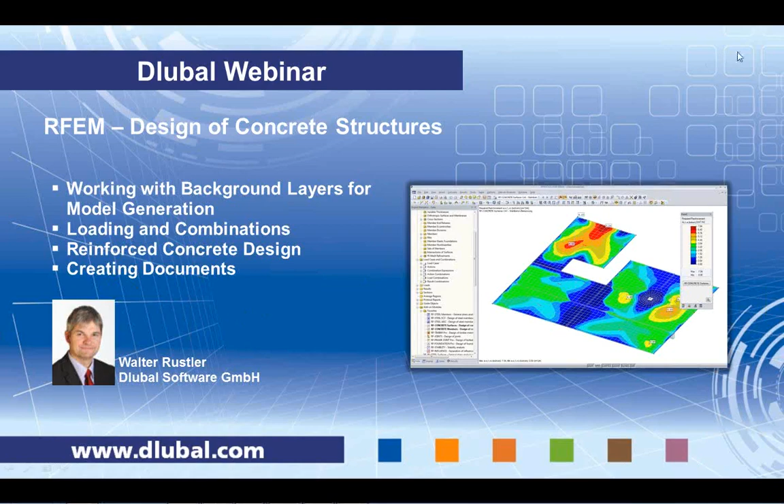The workflow in RFEM is in such a way that you use RFEM, the main module, to create the slab and the concrete structure itself, including loads and combinations. Then you will use certain modules to do the design in concrete. The most important modules are RF-CONCRETE, that includes slab and beam design. There are also additional modules for punching design, namely RF-PUNCH, or for column design, namely RF-CONCRETE Columns.

RF-CONCRETE NL is a more advanced module for nonlinear analysis, especially used for deflection of slabs and for deflection of beams in cracked situation. RF-CONCRETE Deflect is a more simple module that we can use also to analyze deflections of slabs.

In the concrete design modules, we have the following codes available: Eurocode 2, ACI 318, which is the American code, SIA 262, which is a code from Switzerland, GB 50010, which is a Chinese code. Other codes are in preparation and will be also published on our website when they are available and finished.

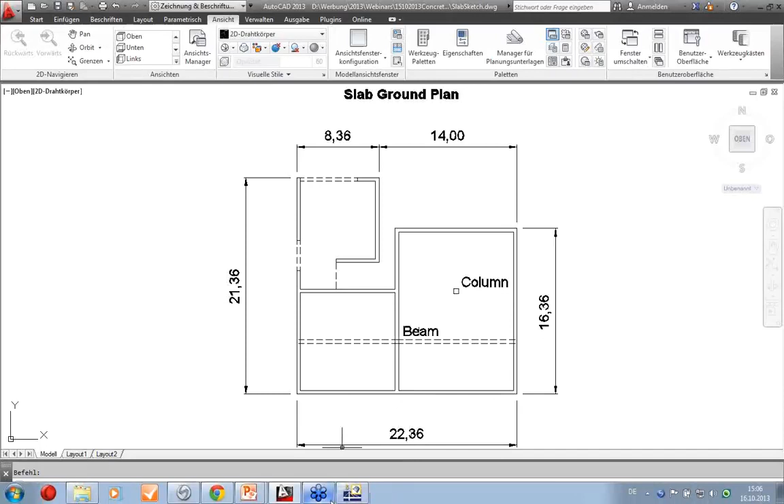To do this, I open a new structure inside RFEM, and I'll have to enter a model name. It will be a 2D model, and the loads will be according to Eurocode EN 1990, and we'll use the general settings for the national annexes throughout this project. We'll create combinations automatically according to this code, and we'll create result combinations, which are linear superpositioned results of the individual load cases.

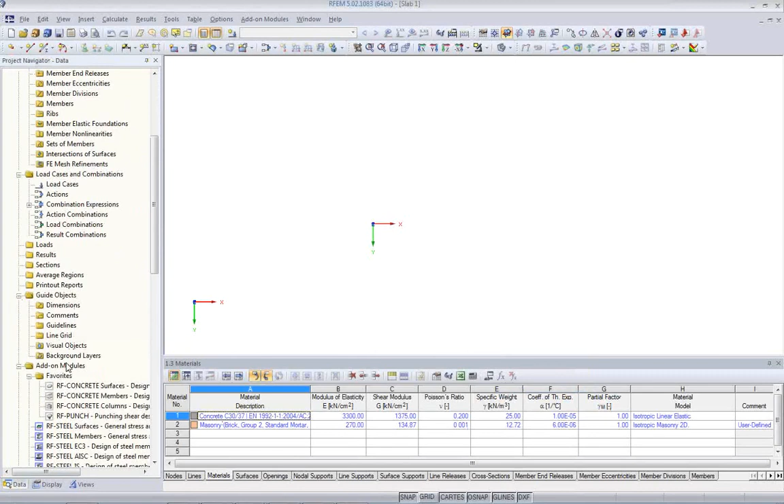Now I can import the background layer. Either you can use File, Import, and you see here DXF format, import as background layer, or you can also go to the Data Navigator and use the Guide objects, and here you find background layers. Right click on it and create a new background layer. I'll import one DXF file I have prepared here as a background layer, and you can name it as you like, sketch from CAD.

Also, you have the option to import from a specific layer that you can select here. You might have drawn already certain lines inside your CAD application that you might want to use for your boundary lines, for your surfaces, but in this case I import the entire lines that I find here. I click on OK, and you'll see the outlines of the slab already in the background. These are not real lines, I cannot touch them at the moment.

Now the situation is so that my actual structural system will not be all the way to the outside of the wall, but maybe already end in the center of the wall. And often as the structural boundary we use the center or the middle of the wall where the slab is placed on. So how to do this?

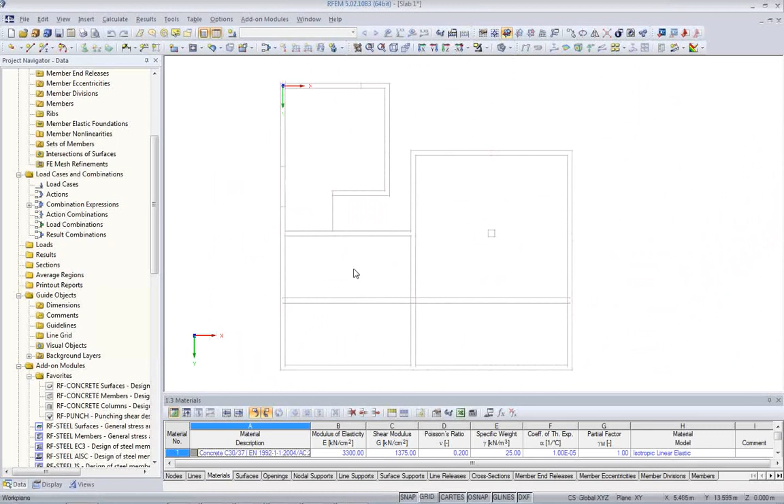I can now use a tool called Set Parallel Line. With this Set Parallel Line tool, I can create a line that is offset from a line that I pick in this background layer. The offset I use here is half of the wall thickness, which is in this case 18 centimeters. And now I can start clicking on the line, and you see in the center of this wall a line is created.

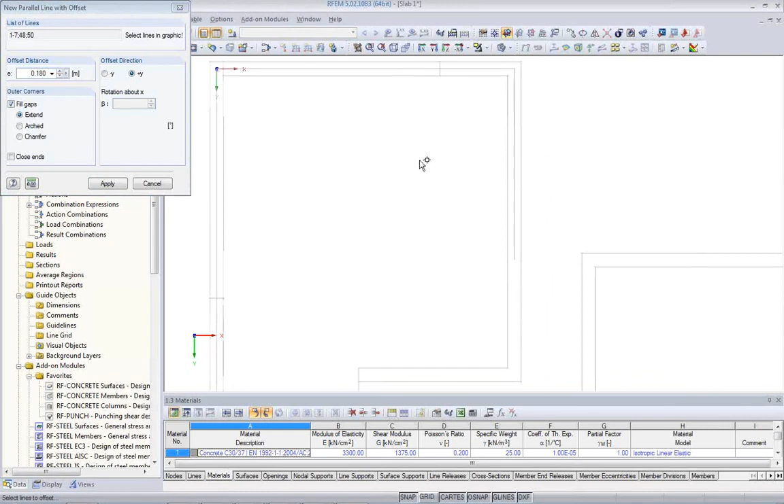And I can now just simply click on all the wall edges that I have in my template and go around the slab here to quickly grab the geometry of the structure from this background layer. So I do not have to use any printed plans or manual drawings, calculate coordinates and so on. So the software is helping me here.

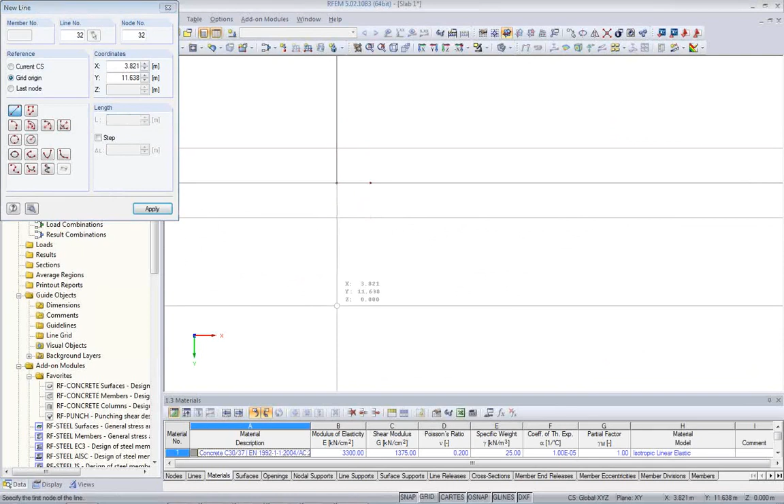Okay, one more here. And then I have a pretty good idea of my slab. So I have to make a few more adjustments. For example, here my drawing wasn't that good, so I can enter manually now a line. I can snap to the existing nodes and create a perpendicular connection here. I don't need this line anymore, and I can just drag and drop the neighboring node there. So with a little bit of manual work, I can fix up my model here.

Here also I'd like to have a perpendicular connection. I just drag and drop it to the next line and fix my holes here. Okay, here maybe there is a node that I don't like to have. I can delete this node and merge the joined lines or members. So out of the two lines, one line is formed. Here again, I'll fix the little problems. This node I need, this node I need.

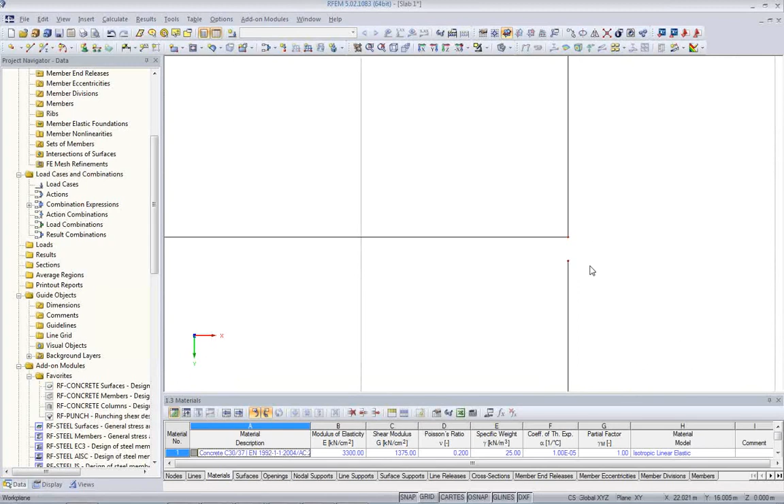Here it is all. There's a slight inaccuracy which is often happening when you work with DXF files. So we can fix this very rapidly with the tools that RFEM provides. Okay. Here we need a little bit, and one more situation here, and we're almost done. Again, here there is some inconsistency. Okay.

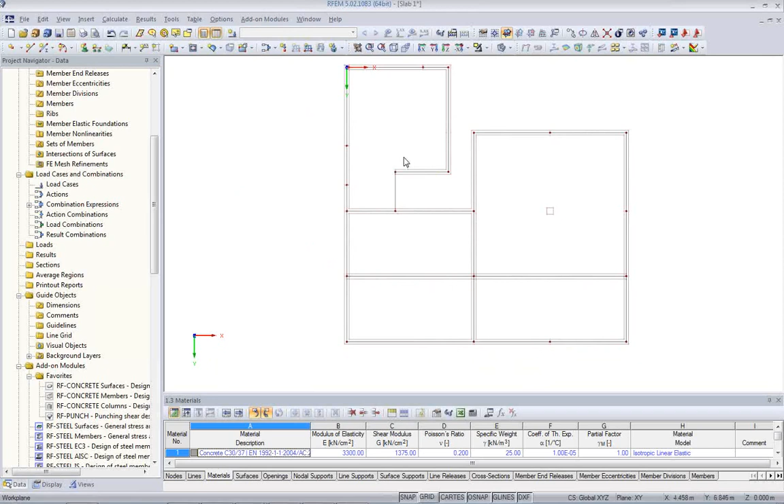One other thing is I have here certain rooms or offices that I would like to apply loads in separate load cases. So it's a good idea to create not just one surface out of this slab here, but create one surface for each room. And that's why I create here a few more lines so I can draw basically my rooms, maybe I do it the other way. Hang on. So I have the correct boundary lines for the surfaces.

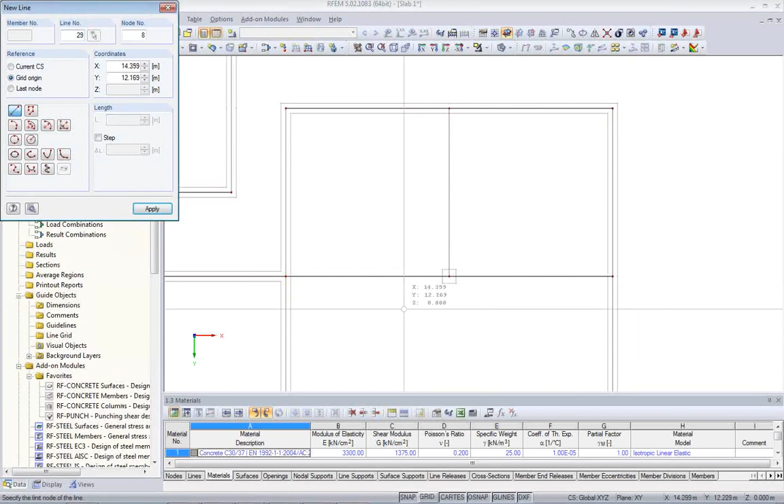Okay. Okay. Here we go. So once we are done, I can maybe delete this one node here. Once we are done, we can hide our background layer. And we can either delete it, or we do not have to delete it. We can go to the display tree and just hide it. There's guide objects as well, and we just hide the background layers. Okay.

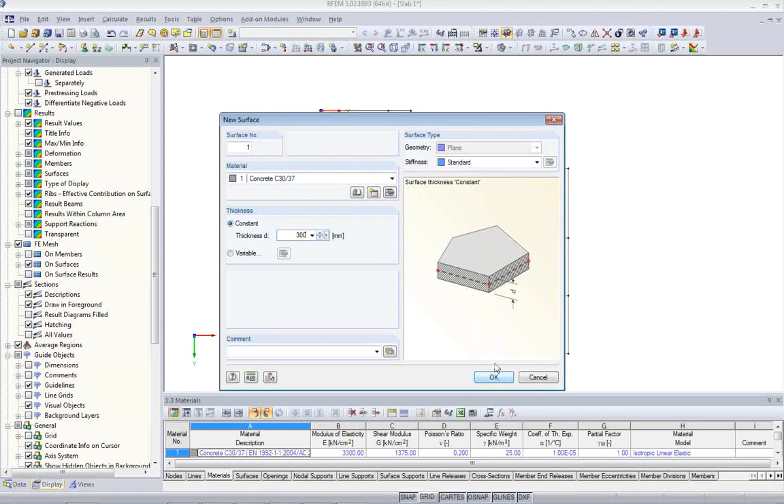Next, we'll have to enter the surfaces itself. So I select the boundary lines. I have here already in this model a couple of materials. I use them, concrete C30/37. Of course, I can always pick something from the library that comes with the software. The thickness should be 300 millimeters and it's a standard surface type.

I'll click on the boundary lines and quickly enter my surfaces one by one. And each surface represents one room that I might want to use later. Okay. Okay. Here we go. And we are done with the surfaces.

Next, we'll enter quickly the linear supports from the walls. Okay. I can either enter a rigid linear or hinged linear support, or as a specialty in RFEM, I can use a so-called elastic support via wall. This tool automatically provides the stiffness of the wall, and for this I have to enter the dimensions of the wall. So the thickness is 360 millimeters, the height is 3 meters.

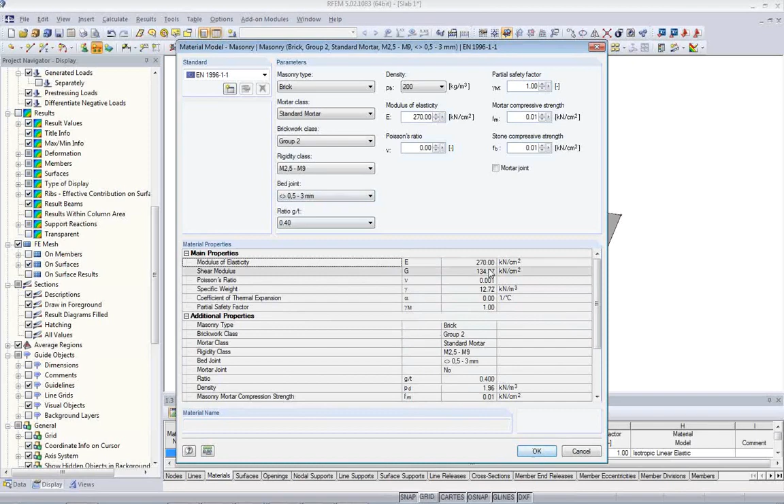The material of the wall I can pick here, for example, from masonry. RFEM has in its library also the option to create certain masonry wall types made from brick and composed with mortar and all the parameters that Eurocode uses. So it's quite a lot of parameters you have to use in Eurocode to get actually the correct material parameters for the masonry used in the wall.

So from these parameters I can create then the modulus of elasticity, the shear modulus, and so on that I need for an analysis. I'll use a linear elastic material law for this, so I'm not using a nonlinear masonry material model. Okay, and I also can address the support condition of the wall on top and bottom, and I will choose the hinged support condition.

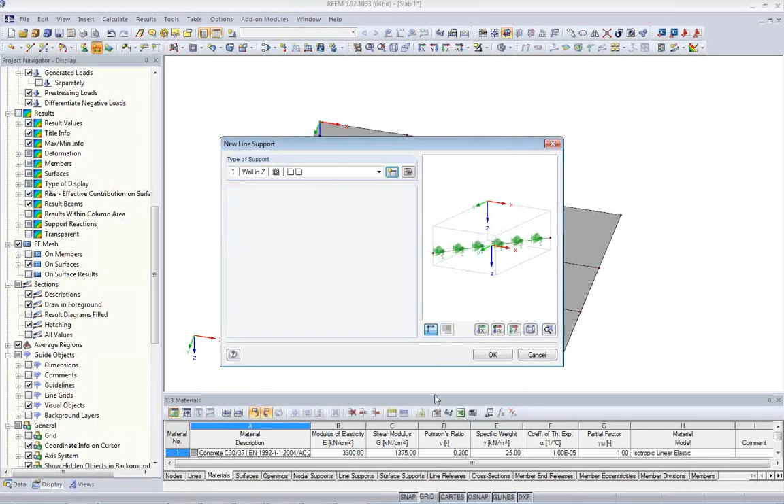Okay, and I see as a result the stiffness for the vertical support created from this wall with the specified dimensions. Okay, next I'll just click on the lines that are supposed to be supported. This one maybe not, I can erase it later. Okay. Okay.

And one more here. Okay. Accidentally I entered the support as well here. I'll delete it.

Next will be point supports, nodal supports. I have a column in this area here, and here I have an equivalent way to do it. There's also the option to select column, and here I have to have the dimension of the columns and the height of the columns and the material. This time I stick with concrete. It should be also hinged, and I can model it as an elastic surface foundation.

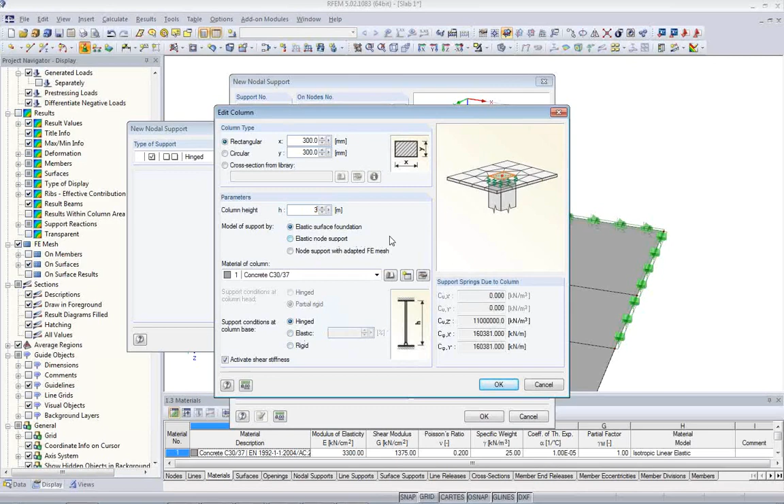That means basically the software uses the 300 by 300 rectangle for an elastic support underneath the slab, and this is a better model than if there were just one node connected to the surface model. So we have a small area that is elastically supported, and that will help to avoid singularities later on.

Also at the same time, it will not show any results inside the column, which is more or less the column material, and it doesn't make sense to make a design there. And I get design actually at the edge of the column.

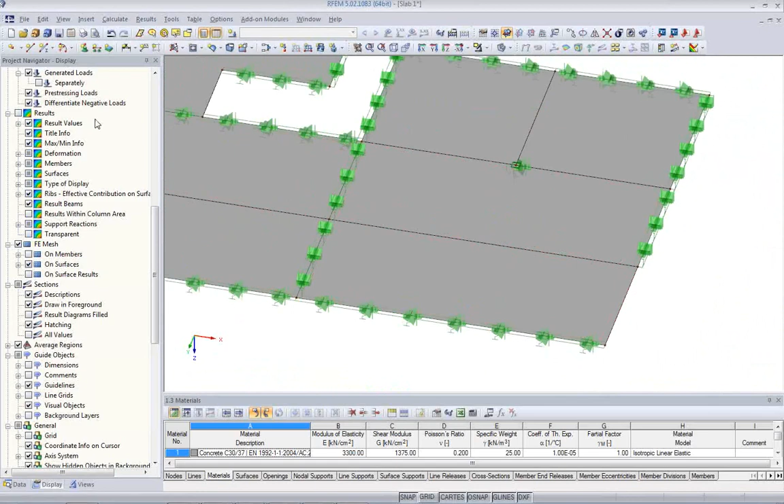Okay, I forgot to have a support here, so actually I can just drag and drop it, Control and left mouse key pressed, and then drop it to the next neighboring line. So now everything seems to be all right. And we are about ready with the model.

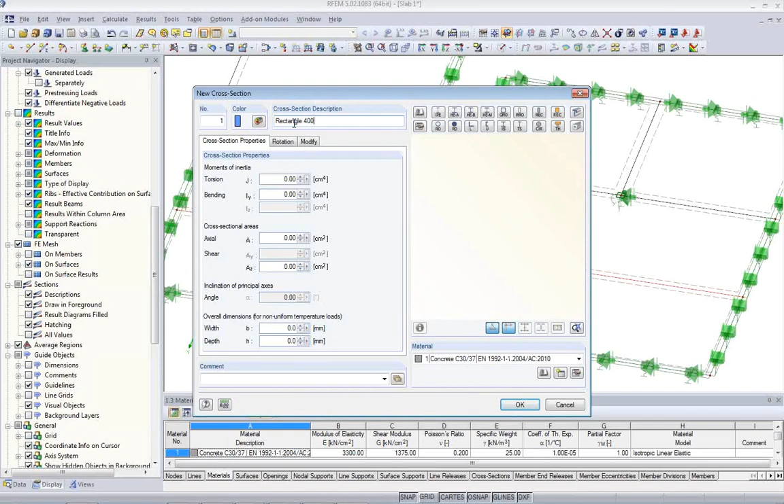Finally, I need to enter the beam that helps to support that wide span here of this surface. For this I select the lines. I'll make a member available, and for this I need a cross section. I enter here rectangle 400 times 600 and made from concrete as well. And as a specialty here, I'll create a so-called rib.

A rib will place the cross section, the rectangle, below the surface, and I can control it here with these radio buttons. Now the position will be on the plus Z side of the surface, and at the end I will get internal forces from this beam composed of the part of the surface and the beam itself, the rectangle cross section below. And I have to specify the effective width of the part of the surface, and I can do this here with the effective width on both sides.

So the software will then integrate the internal forces in the slab into 1D member internal forces together with the beam, the eccentric beam that is located below the slab. We will see the forces then later as beam forces. And we will also design this T shape in the member design of our concrete members.

I can also take control of the rigidity stiffness of this beam part below the surface, because in cracked situation the torsional stiffness of the beams is reduced pretty much. Often in standard practice you reduce the stiffness of this beam when you analyze the internal forces. I'll leave it here at 100%, but I just wanted to let you know that you have this option. By clicking on OK, we'll see the eccentric beam here below the surface.

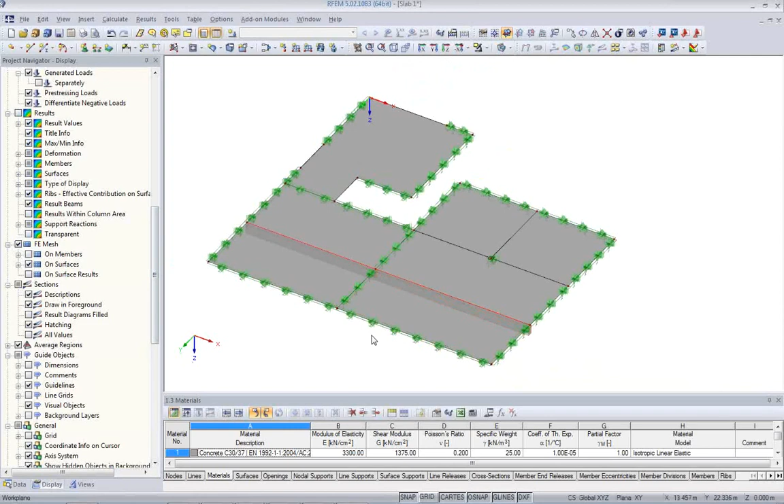Okay, this is the model, and now we can maybe already start with my documentation for this slab. First of all, I'd like to show the numbering of the lines and of the surfaces, because those will then also show up in the tabular output of the printout report. And I'll print this picture to the printout report. This should be maybe 50% of a page. And I'll click on OK.

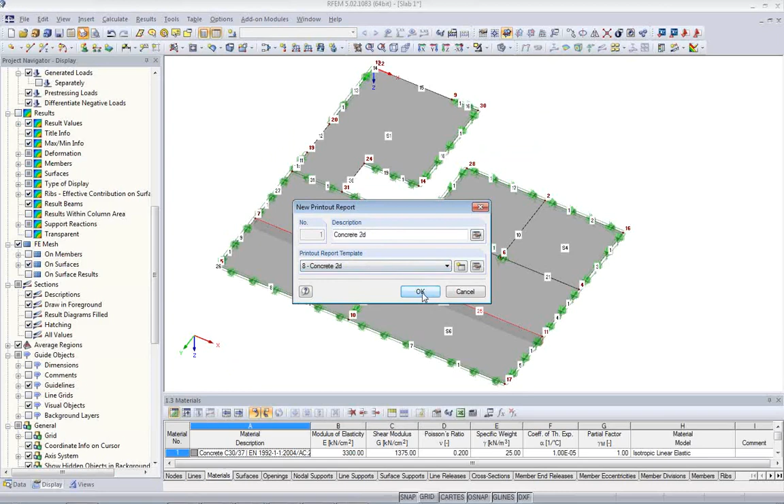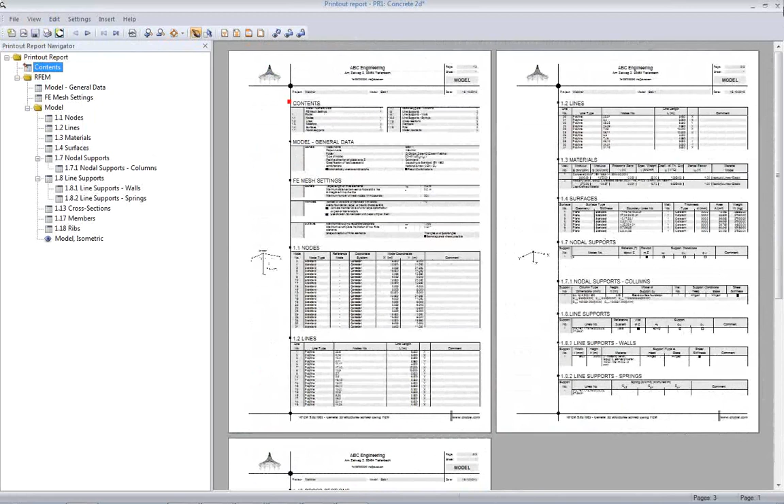And the printout report template I'm going to use will be one that I prepared before, Concrete 2D. We see a short preview of the printout report with all the tabular input and the picture that we just printed. So everything that I entered now is here already in a tabular format, and it's documented for checking later on. You can maybe zoom it to 2 pages, which gives a very compact view of the printout report. Okay, once it's created, I close it again and I save it.

Next, we'll have to deal with the loads and load combinations. I can do this either here, create new load case, or I can do this in the tables. And in the tables, it's maybe more simple because I can just work like in a spreadsheet, and it's quite quick. First load case is self-weight. Second load case is some live load, and it has action category imposed office area. And it will always remember the last input, so what I have to do now is just enter quickly the other load cases. We have 7 surfaces, 8 load cases in total.

Okay, after this, I have the next table, which will sum up all the load cases in so-called actions, and I can select which design situations I would like to work with. For this example, I will use the ultimate limit design situation and the serviceability design situation, which is the quasi-permanent combination in Eurocode. After that, I get action combinations.

Load combinations will stay empty because we work with result combinations, which are combinations that overlap linearly analyzed results. And at the end, we will mostly work with the result combination 5 and 6, which will include the envelope of all the design situations and serviceability situations. Note that we will use in the design situation additional partial safety factors, 1.35 and 1.5 for the office area.

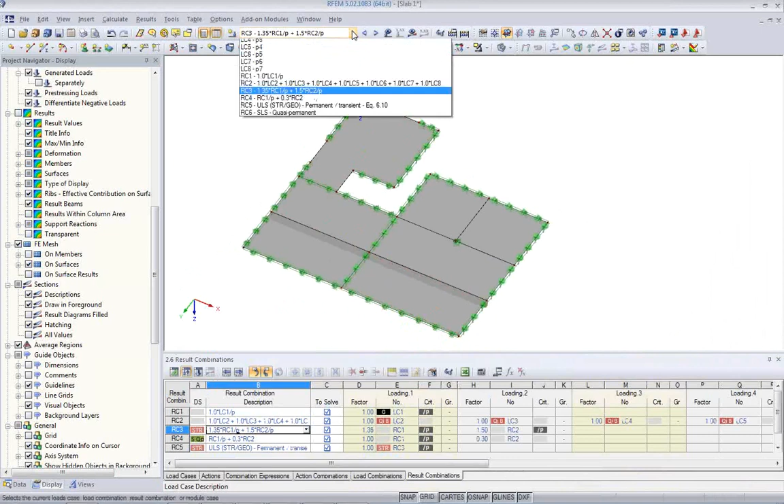Okay, this is the combinations and the plain load cases. Next will be the loads itself. We'll create a new surface load for the self-weight load case, 2.5 kilonewton per square meter, going to all the surfaces. Next will be the live load, 3.5 kilonewton per square meter on each surface individually per load case. I can just change the load case while I'm still in the entering mode of the load itself. So this way I'm rather quickly with entering those load cases.

Last but not least, I will take a look at the mesh generation parameters before I run the calculation. In the mesh settings, I set a target length for the finite elements of 500 millimeters. And if I work in a 2D plate XY structure, I have an additional option that allows me to make a finer mesh along the edge of each surface. And you can control it by this parameter here.

So this is a good idea because where I have the linear supports, and mostly they are at the edges, I have large gradients of stresses, and especially for shear forces, it will somewhat condense those extreme values closer to the edge inside, if you want so, inside of the wall. And they will not be disturbing the design later on in RF-CONCRETE Surfaces so much.

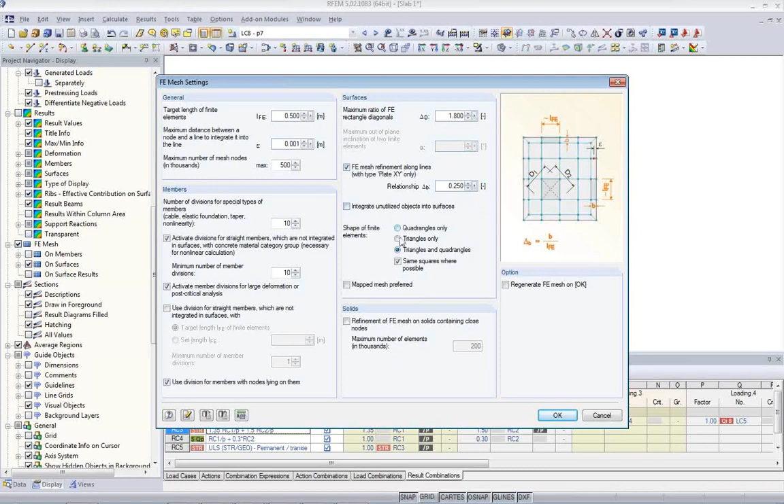Okay, and I do one more mesh refinement that will be done in the area where I have the point support. Here I can just select the node, right mouse click, finite element mesh refinement. I create a new one. I'll use a rectangular type, and I'll take over the default parameters which fit very well to the dimensions of the column with 0.5 meter at the moment.

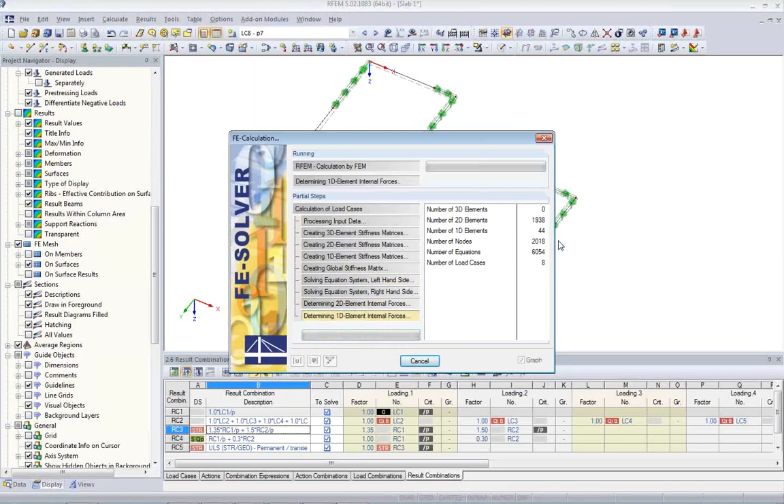Inside there is a finer mesh, and on the outside there will be actually the target length of the global FE mesh that I just said before. So there's a good transition from the finer mesh to the global target lengths of the finite element mesh. Okay, with this I can start the analysis. So I can calculate all the results. Mesh is created automatically in the background, and I'll see for each load case now first the deflections.

I can also view the internal forces, maybe in the top view. I can now also control if I want to see the finite element mesh or not, if I want to see my supports or not. I can maybe hide the support lines because I don't want to see them now. I'd like to see the results. Okay, this picture now is good for documentation.

I need my internal forces to put into the document. So how to do this? I have here the panel that indicates the magnitude of the forces. I can print and use the mass print option. In the mass print option, I scale it to 50%. I have the option to control the results of maybe selected load cases. Maybe I only want to see my final results, the ultimate limit and the quasi-permanent results in the envelope.

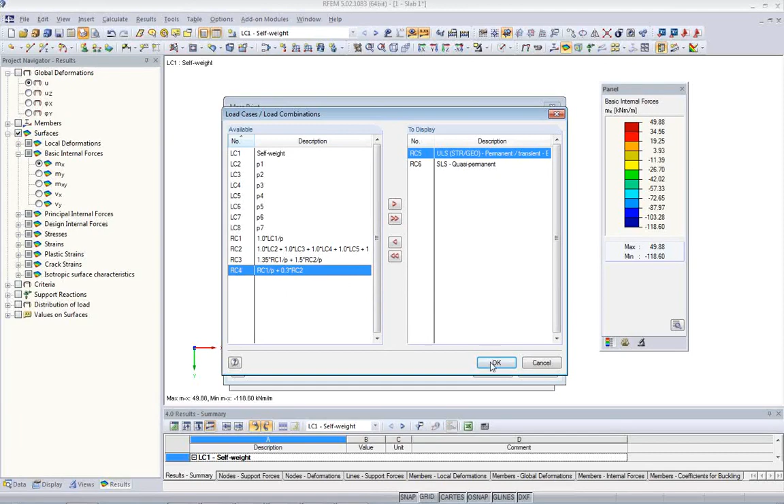And I click OK, and I want to see MX, MY, MXY, the shear forces, everything I want to have in the protocol. On OK, I'll then check show printout report. I disable it because I don't want to always open the printout report. I just will drop it in my final printout report. And I click OK, and RFEM then dumps it into the final printout report.

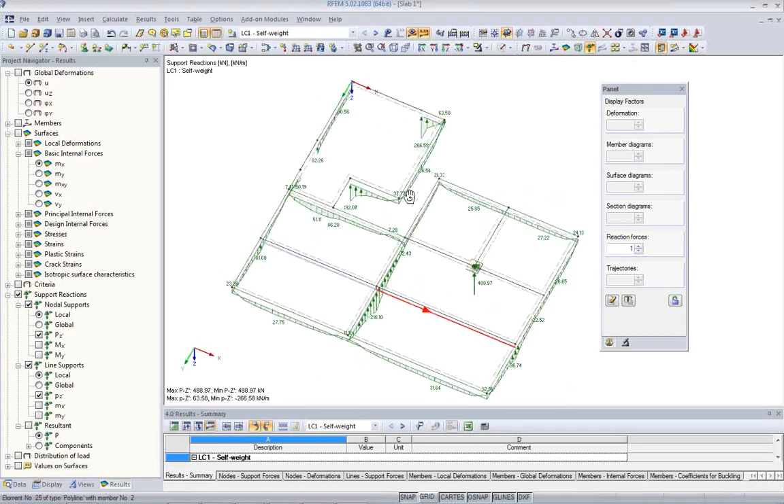Also of interest is not only the surface internal forces, but also the support reactions. I enable them here, and you see that you can't see them because they are drawn below in direction Z. How to fix this problem? RFEM has a specialty that for 2D surfaces, it can draw the support reactions in the XY plane. So I can kind of swap them over, and then I see the support reactions here in a much better view.

Often engineers do not work with the real lines of the support forces because when there is a masonry wall, the force transfer is not one-to-one from the support of the slab down to the next maybe wall below.

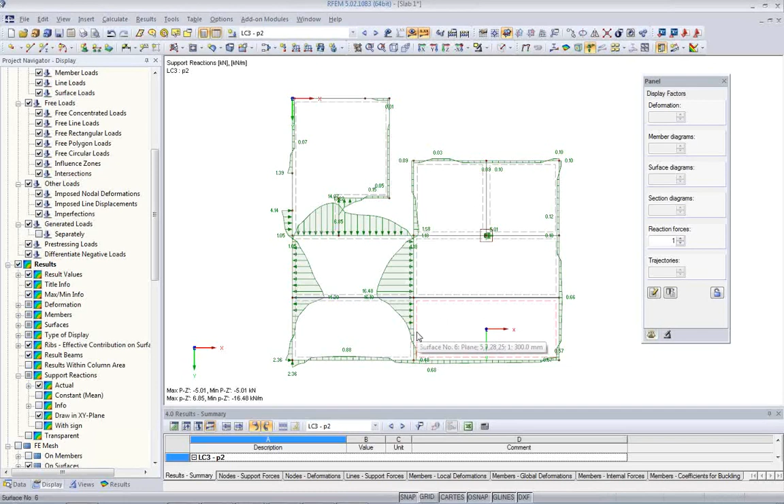There's some kind of distribution that is depending on the stiffness of the material that is used for the walls. So in many cases, it's also suitable to work with smoothed, mean, constant forces. So what we do is we integrate all the support forces along the line and average them to a mean value. So this is a good way how you can maybe use this information also for a load on the next story that you have maybe below.

So this type of picture I would like to print also in the printout report. So I use again the mass print option. I'll click on detail setting, results, and this time I'm enabling the support reactions and local reactions, line supports, and also the nodal supports. Okay, I don't want to do it for all the results. I only want to do it for the individual load cases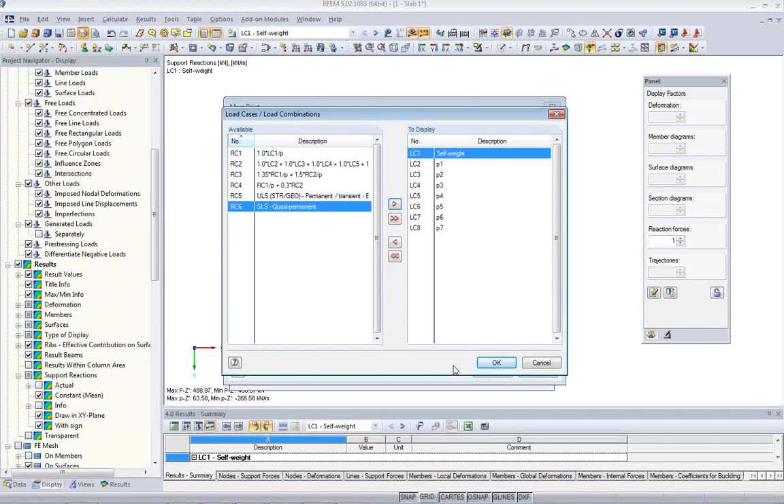because when I keep on calculating with those forces, it's a good control, first of all, and second of all, I might have to apply different safety factors, so the result combinations really don't help me very much if I print them. Okay, all load cases, all images of all load cases are printed in this way. Okay, then

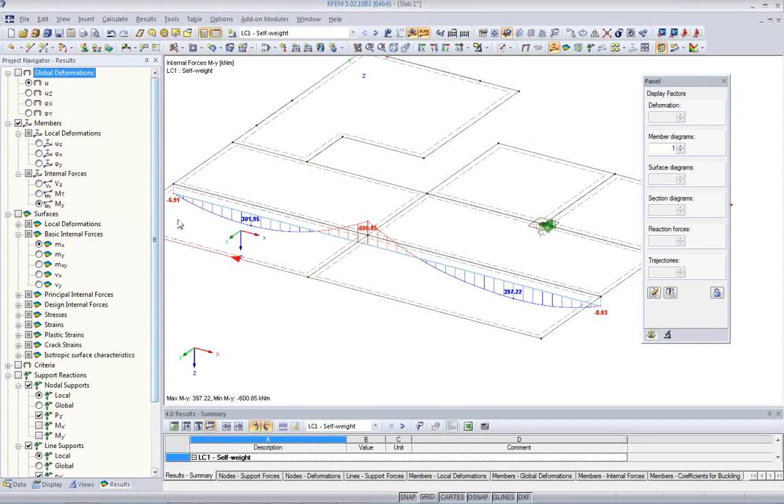next picture is maybe the member internal forces that I have to take a look at. If I look at my internal forces here, I can see here there are beam forces, bending moment, shear forces, torsional moments, and so on that come from the twist introduced by the slab. I can print also this result, but there is another good way how to document it. It's in the so-called result diagram.

And I can use this result diagram and print all my forces, maybe also including the deformation, into the printout report. And this time again I use the envelope. Maybe we stick with the bending moment and the shear force. Maybe we add the torsion. Okay, we print this to the printout report. I will use an entire page this time. Okay. Good. Now we have already done all the internal forces, support reaction, bending moments, beam results.

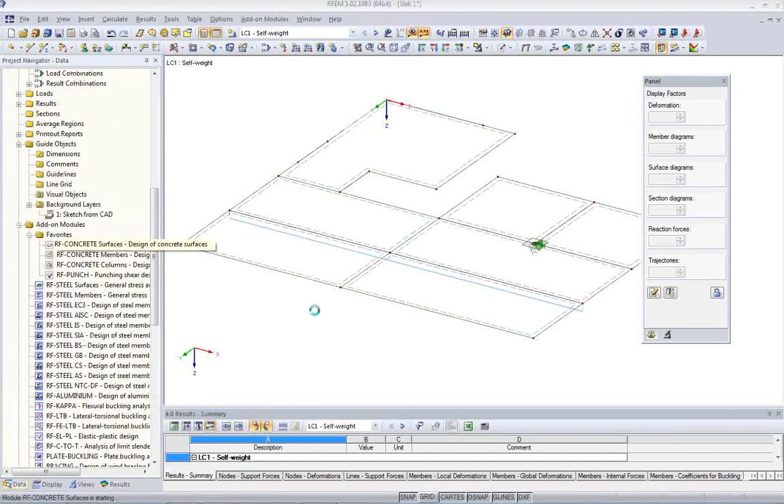Next, we'll go to the concrete design. Here we'll first use the module RF-CONCRETE Surfaces, and the RF-CONCRETE Surfaces module will design the surfaces as it says. We'll use for the ultimate limit design the result combination 5, which includes the envelope of all the results of all the individual combinations. We use Eurocode with the standard settings of the Eurocodes. For serviceability limit state design, we use the quasi-permanent combination.

We can check the materials, which are just taken over from RFEM. We'll see in the surface pane a list of all the surfaces, and I have different options here to check. First, we need to check the stresses. This is part of the serviceability check. The stresses for the concrete that takes over the compression. Regarding the code, there are certain settings that limit the compressive stress, and you can just choose them. Everything is set up by default, so in general you wouldn't have to change anything.

Also, steel stresses have to be limited, for example, typically to 80% of the yield stress of the material. If you want to, you can set those settings individually for each surface. And the next thing is the crack width control, and here I have to define, first of all, what is the limiting crack width. It should be according to the exposure class, and in this case I have XC1, which will be resulting in 0.4 as allowable crack width.

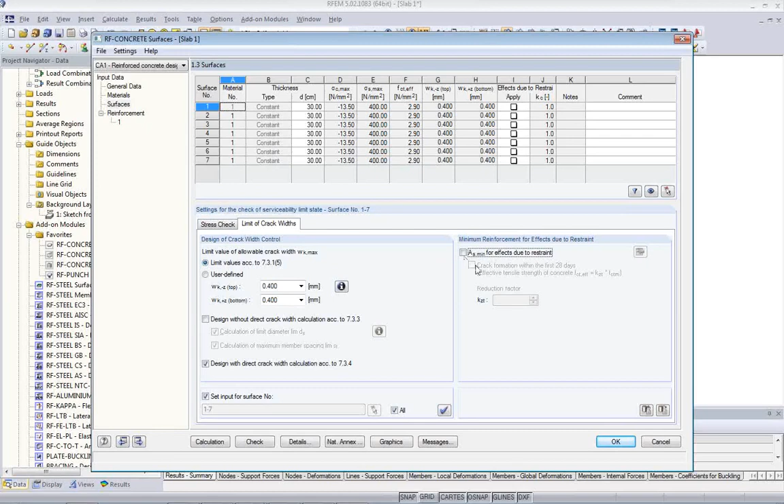If it is important, you can also analyze a minimum reinforcement for effects due to an internal restraint. In this case, we don't have this. This can have a significant amount of bars as a consequence. But this slab can float free on the walls, so there is basically no restraint, and we can ignore it.

Okay, this was some settings regarding the serviceability check.

Regarding the reinforcement, I'll first have to have an idea how much reinforcement I need. Then I can decide if I put a basic reinforcement that will be everywhere on the slab, or if I have two layers of reinforcement - one basic and one additional.

The reinforcement layout is done in the second tab, where I first have to define the concrete cover. Here I can pick it from the exposure class of the code, and it can be different on top and bottom of the slab, because one can be exposed to outside, one can be exposed to inside. Then you have different concrete covers that you need to check. From these parameters, RFEM or RF Concrete calculates the required cover.

For the longitudinal reinforcement, I can already set a basic reinforcement, which I will do later, but first of all I want to have a first run of the analysis and see what situations I have.

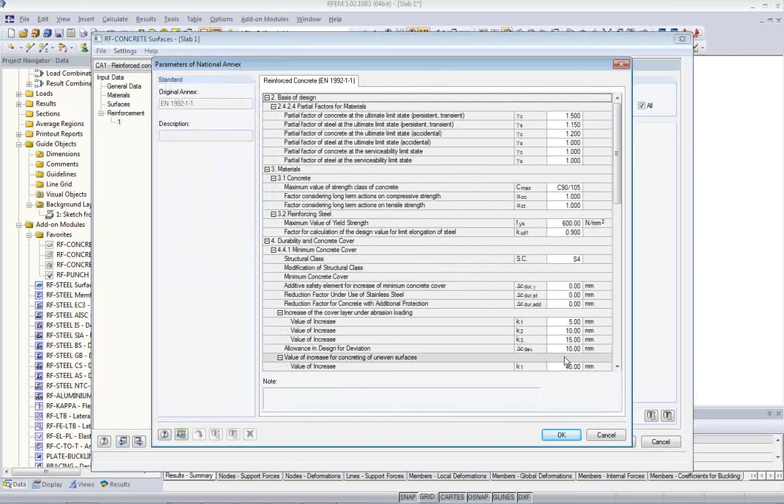Okay, those are the most important topics I would like to point out. The national annex parameters can be shown down here. You can change them and also set them up differently if there are changes in the national annex or whatever.

Also in the details, one point I need to point out is which internal forces you use for design. Remember, we have a beam that already integrates part of the internal forces from the slab, and I'll get a design for this T section. So this part of the slab that's already part of the design in the beam, I do not have to apply for this surface design - at least in the direction of the longitudinal direction of the beam.

That's why I check this checkbox here, and I will not use it for the surface design. Otherwise I will get reinforcement from the slab design or surface design and reinforcement from the beam design, and that would be double, and I don't want to have that. Okay, now I'm ready to run the analysis and get a first idea about my reinforcement.

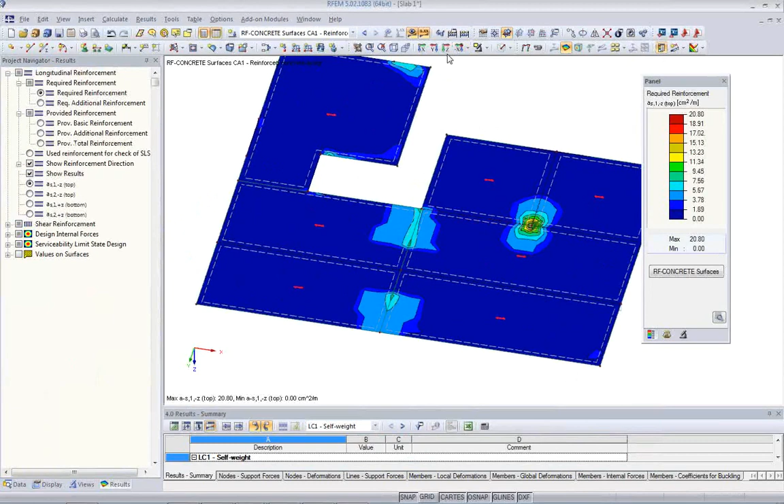Let's take a look where we have those problems, and I go to the graphic, and we get first the display of the required reinforcement on the top, then on the top in the other direction. Note here the direction is indicated by these little red marks. Then we have the bottom reinforcement in one direction, bottom reinforcement in the other direction.

We see here now the direction longitudinal to the beam takes out the design pretty much of this reinforcement where we have defined the beam. So RFEM knows that there was 1.60 meters left and right of this beam, and this section will be part of the beam design.

Okay, let's take a look of the content that we need of rebars. If we see the blue and greenish areas, we talk about 4.08 square centimeters per meter. So if I would cover this with a basic reinforcement, I would have only a few spots where I would have to have additional reinforcement, for example here.

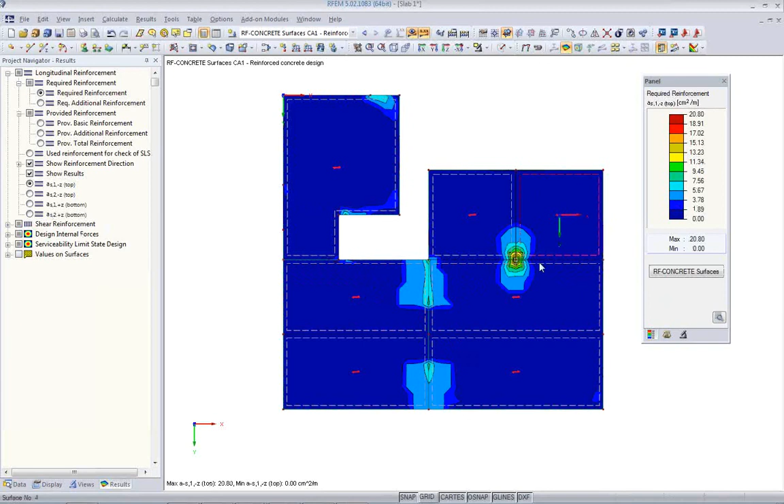And if I look at the other direction, it would be - if I do here also 4, then it's greenish. All the green parts will be taken care of. So if I look at the top reinforcement, let's say 4 would be pretty much of the dark blue would be covered, only a few spots left.

So I'm trying now to add additional reinforcement, or the basic reinforcement, on the surface, on all the surfaces. Go to the reinforcement layout and longitudinal reinforcement, and here I can enter an existing provided reinforcement. Either I pick a diameter and a distance, and I'll get the content of reinforcement shown below. For example, I can use a 10 millimeter bar every 200 millimeters. It will be about almost 4 square centimeters per meter of reinforcement.

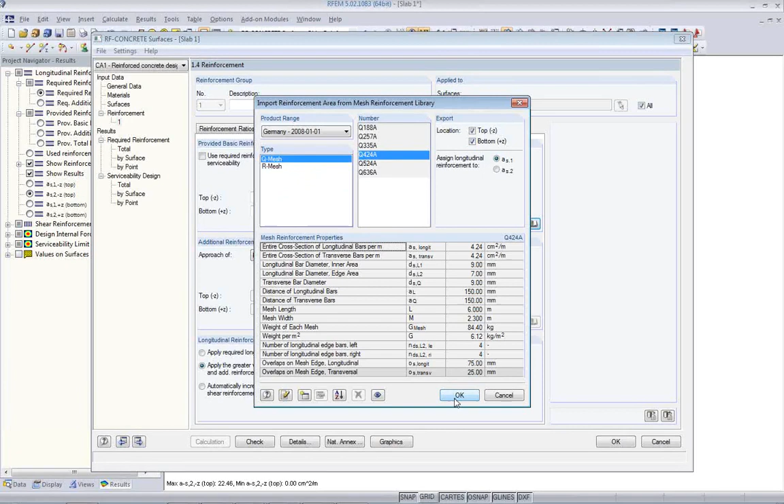Or I can use wire fabric that I can buy, maybe cheaper, or easier to mount, and I can use some quadratic wire mesh for top and bottom. And this I'll use already for my design. It will play an important role for the serviceability check as well, because the diameter plays a role here, and I have already an existing reinforcement there.

Okay, I run the analysis again, and now I have different options to display my results. First of all, I have here a little bit less, well required is the same, but I have here additional required, so there's the difference here. This is the basic reinforcement.

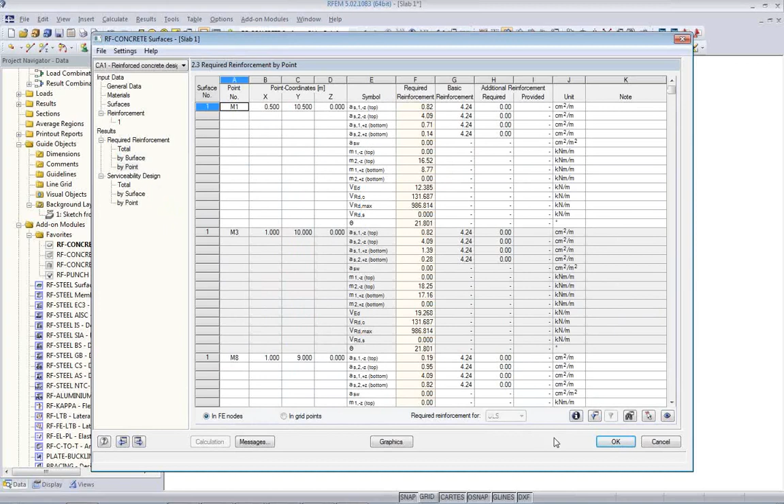I can look at these results also by surface or by point and so on. If I want to, I also can look into the design details. So for every mesh point, I get an enormous amount of detailed results that I can use to check my analysis if it is correct. So if there is one question, one doubt about the result, I can go there and I get all the results, all the details. For every grid point on the structure, I can get those internal details, and we have a very powerful way to really see what the software is doing internally.

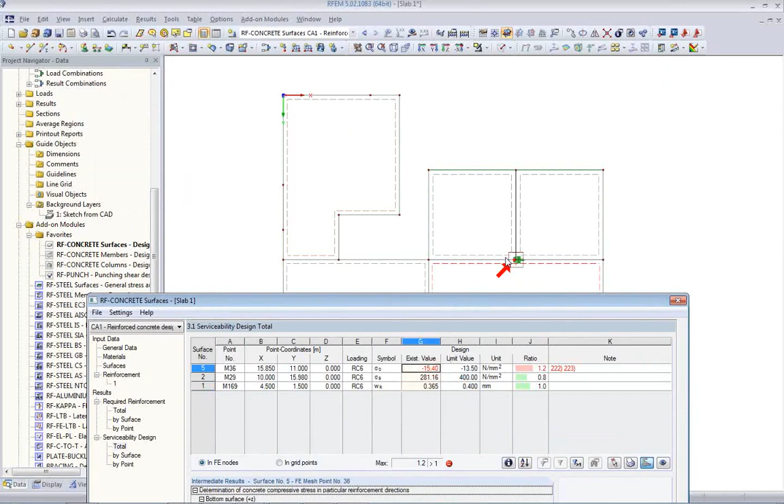Okay, and the same is also here for serviceability design, and I see here, okay, with the crack width we are fine. There's only a small problem left with the compressive strengths, and if I click here, I see it's where I have a punching problem actually at the end, and I will have to do something with it, but maybe I can just neglect this part for now.

When I go to the graphics, I have now additional options. I can show first of all the required reinforcement, what we've seen before, but now I can also say I want to see the required additional reinforcement. So it shows me the difference of what I have provided by a basic reinforcement and what I have to add additionally. So here, this is for the top, so there's pretty much nothing, just at this point we have to think about doing something, and here we'll do a punching check later on.

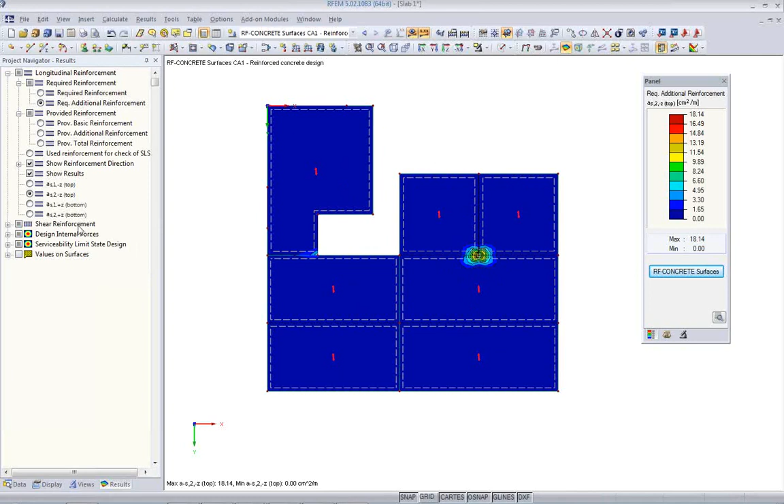And on the bottom, here I have maybe in this area I need to have extra reinforcement. Here is a small area, but there's only about 1.292. Maybe if I add a little bit more on the basic reinforcement, after all, I have not to do anything here anymore. And the same thing is in the other direction.

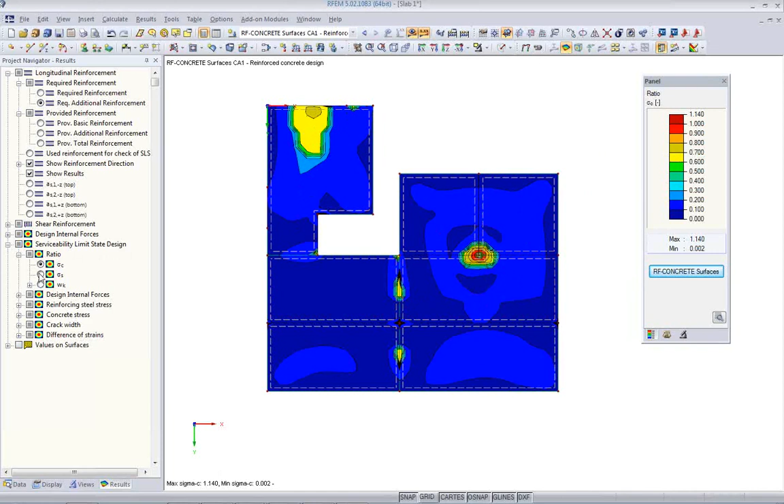When I take a look at the serviceability, I can check my concrete compressive strength, stress, and I get a ratio. If it's greater than 1 it's exceeded, if it's smaller than 1, it's fine. So we have the yellow parts are pretty much okay. The steel stresses are okay overall, and I have my crack width. So I have only cracking that appears here, a little bit here, it's not surprising, over the wall, and of course here, but this part again we have to take a closer look later.

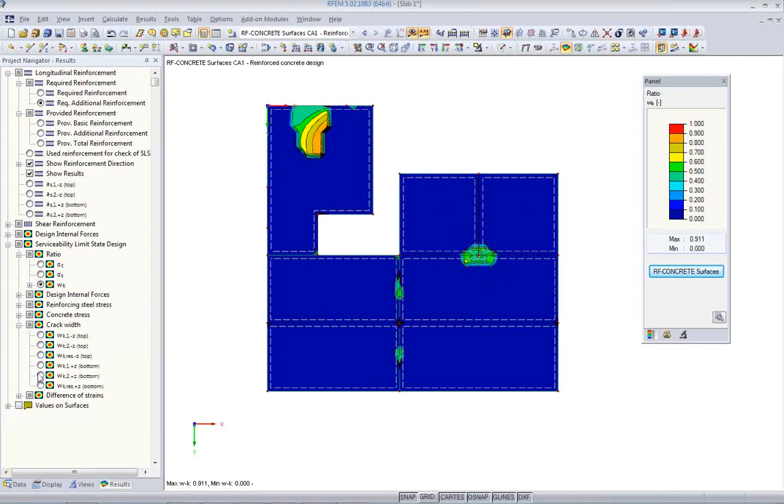Also I can check the crack width on top and on bottom, maybe on bottom in direction 1 and bottom in direction 2, and also the resulting of both directions can be shown.

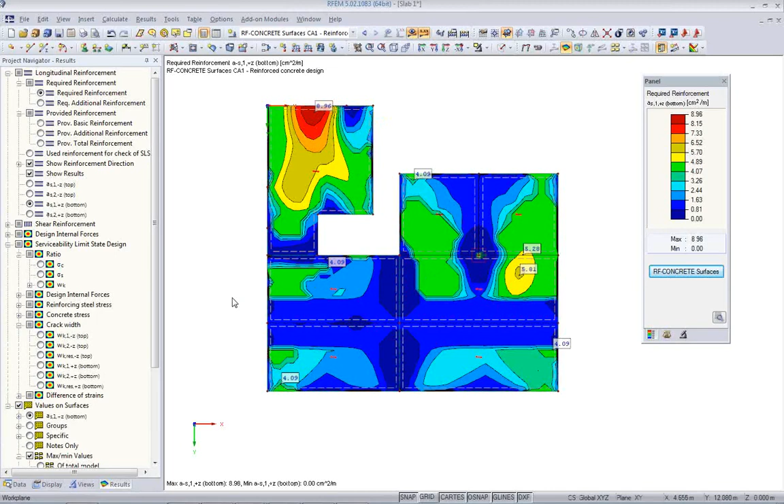Okay, I'd like to also show some values on the surfaces for printing, because we also want to print the results. So maybe it's better to reduce the values so that I get only one value per surface, the max and the min value. Each time I change the result, those values will be then also adjusted. I go to the reinforcement, maybe the required reinforcement, you get a nice view, also including some values showing which reinforcement you have there. Okay, those pictures I'd like to print again.

So we'll print this picture. We use the mass print option, using again 50% of page size. And also for the concrete module, I have the mass print option that shows all the results, all the rebar content on top and bottom in all directions for all cases, and also the same thing for the required additional reinforcement. So all in all, it should be something like 8 graphs. I click OK, and I drop it again in my printout report.

So far about the design of the slabs. Next will be the design of the members of this beam here.

We enter the concrete member module, and for the ultimate limit we also use Eurocode, using result combination 5, and for the serviceability limit design, result combination 6. This time I also activate creep and shrinkage that we can use here for this beam. And I'd like to point out that we can also do fire resistant design for beams and also for the column module, so if that is needed, it's also included for our concrete members and for the columns.

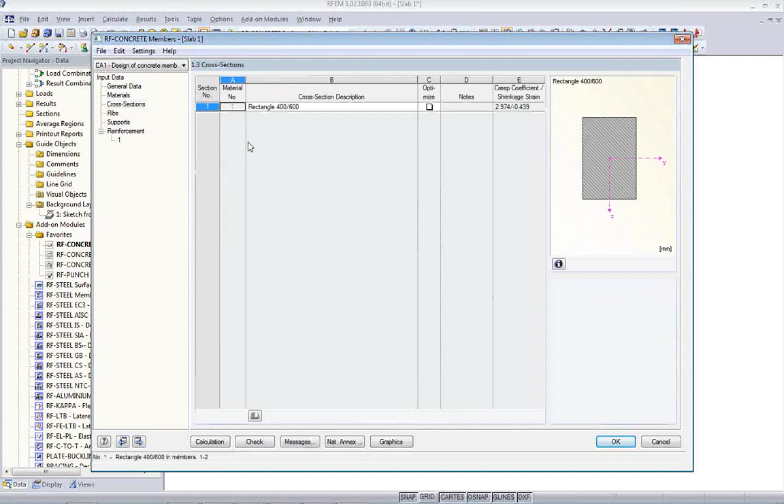As I said, we use part of the surfaces for the member internal forces, and we entered it inside RFEM. So what we're actually doing is designing a T section, and the internal forces come from the surface and the beam below it, and they are integrated to one member. So the effective width is given here.

You have the option to change the effective width in the design module if you want to. So when you have a negative moment or a positive moment, you can design a smaller cross section where there are cracks, for example, and a bigger cross section where the slab is in compression. So there are various options that you can use, and in the Eurocode there are some requirements regarding this.

I'll stick with the simplified method and just keep everything constant at the moment. Also, I can reduce the shear forces that are near to supports, and I'll have to indicate where the supports are - they are here at those points - and I have to indicate whether it is an end support or an intermediate support, and I have to enter the width of the support.

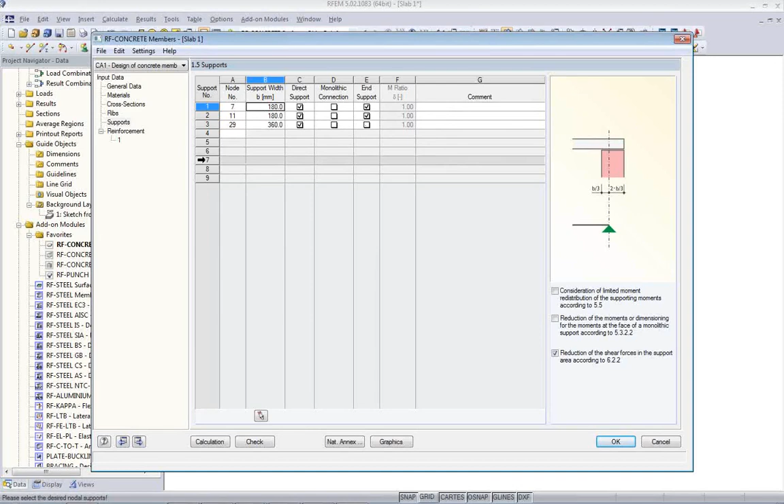So this will optimize my results in there. Next, I'll go to the reinforcement. We can now enter which diameters are possible.

So we choose 14, 16, 20 millimeters of longitudinal rebars. Same thing for the links - we can define which diameters we want to use there. We can use certain spacing of links. There are certain options that you can use.

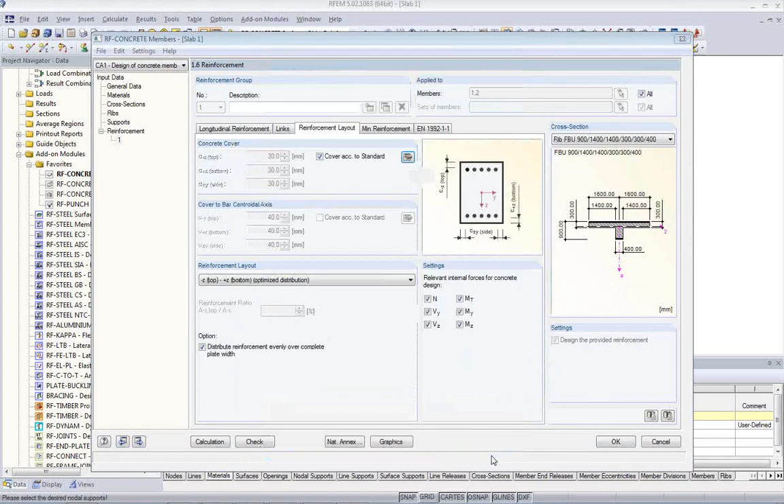Reinforcement layout is similar to the reinforcement layout that we had in the surface model, where we, for example, have to find the cover of the concrete. I use again exposure class XC1. Minimum reinforcement, ductility reinforcement is taken care of, and I need to have the concrete cover setting as well.

Okay, with this I'll start my analysis and run the design of the beam.

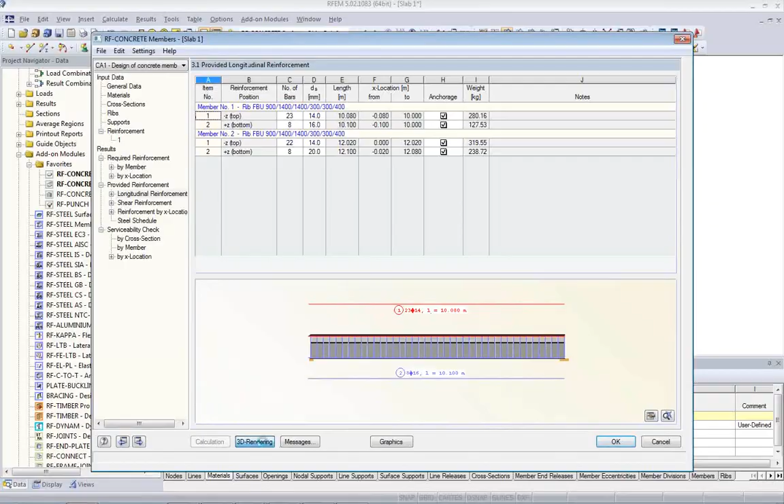We see here first an overview again about the required reinforcement and the provided reinforcement. So you get a reinforcement suggestion that you can use. We can also use a 3D rendered view that we can show. We can print this to the printout report as well. Here I use again 50% of a page.

Same thing for the shear reinforcement - you get here a sketch of the shear reinforcement that will be also part of the printout report. For the serviceability check, we see here that we have actually crack width of 0.2 for the maximum. The deflection is here, and everything seems to be quite okay.

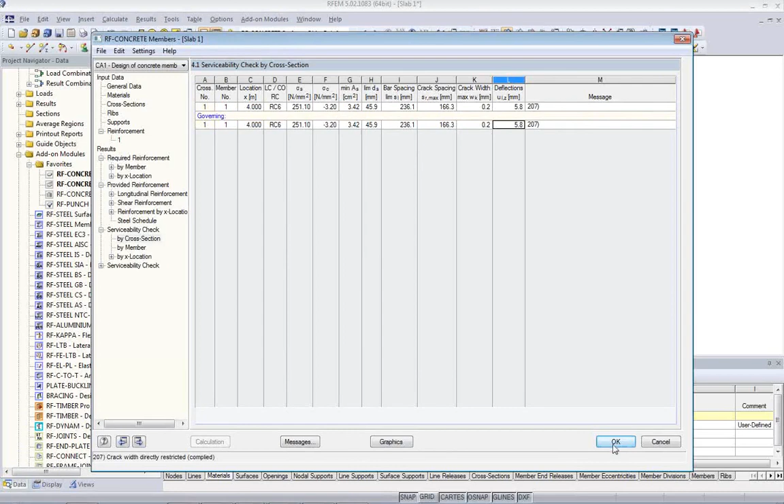We can take a look at the graphics. I'll show here the graphic view of the beam, and we see here the top and the bottom reinforcement.

We can show the provided top and bottom reinforcement. So we see the software provided more as required, so we're on the safe side. If you want to, you can subdivide those members and make it more individual along the beam.

I can print also this picture to the printout report. Printout report at 50%, okay, as screen view, and we'll print it.

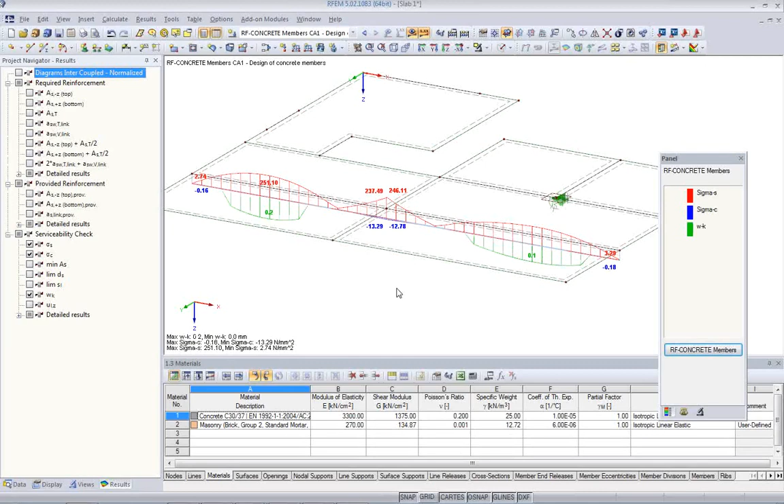Also, I can show my serviceability checks. We can see the compressive stress for the concrete, for the steel, the tension stress, and I can show also my - maybe I take 2 pictures, print this, okay - and then I print another one with the location of the cracks and the deflection, and print this as well.

Okay, this is the design of the concrete members.

After all, we can now maybe take a look at our printout report, and I'll just make a quick save in between, and then see how the printout report looks like.

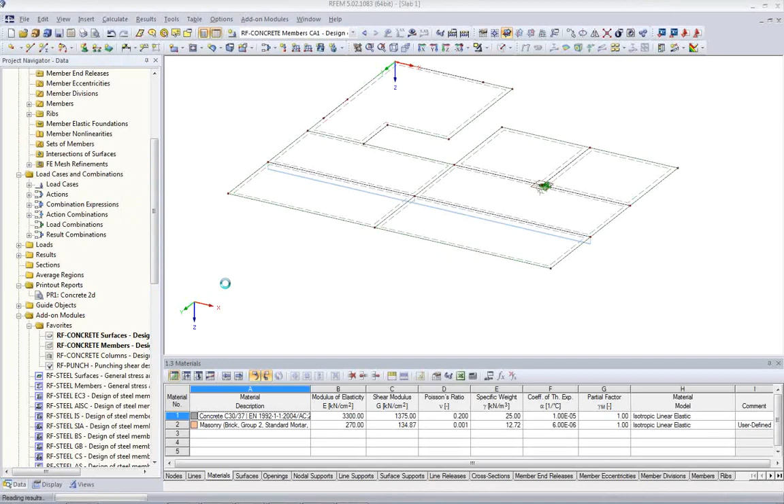I have the printout report here in the data navigator, and with double clicking on it I can open it. And we should see some more data as before. Okay, it takes some time to build.

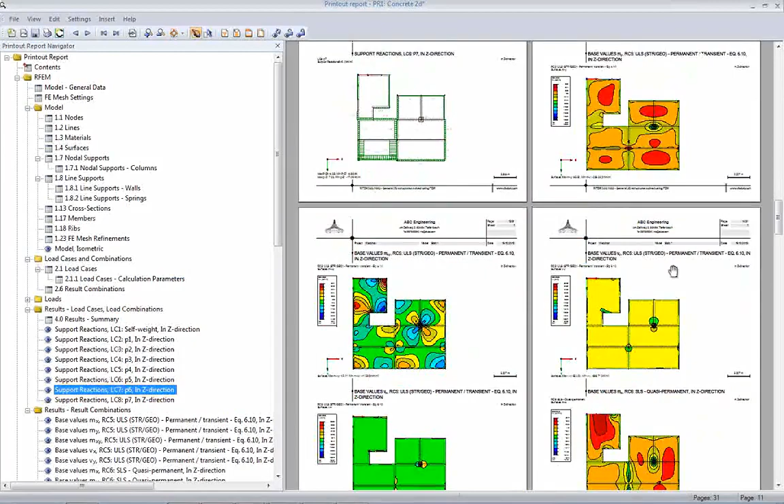Okay, so I'd like to view maybe 2 pages at once, and I can see here my support reactions that I printed before. I can see here also my internal forces that I printed for all the design situations. I see my internal forces for the beam.

All the tables that I have here regarding the concrete design, and I don't have results here of the concrete slabs because I didn't analyze those results, but the beam is here, and we see here the pictures that I printed individually just before I opened the printout report. Altogether we have 31 pages.

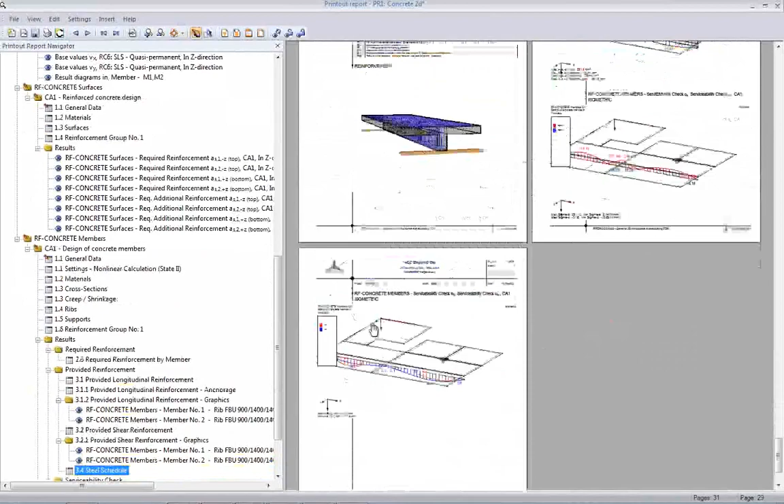If I want to see the results of the surface design, I have to close it again, and I have to analyze the results of concrete surface as well, and then I should also see those results in the printout report. Okay, let's open it one more time. And then I think we are pretty much also at the end of this demonstration.

So now let's see if we can see all the other results of the concrete design. RF concrete, here we go. It takes some time. It loads the results while we are navigating, and here we see also the reinforcement and everything. It seems to be clear here again. Okay.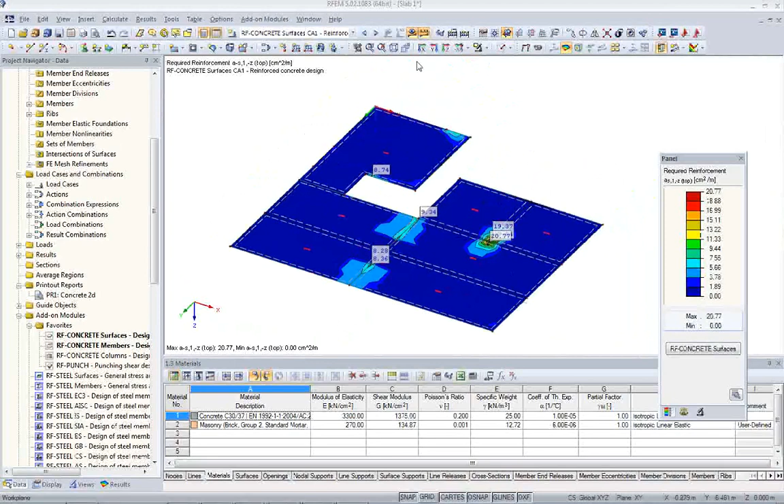I have picked some of the questions that have come in, and one question that came in more or less several times is about the real deflection of the slab in the cracked situation. Now everything was pretty much linear deflection, but if I want to have the real deflection of the slab in the cracked situation, I can do this with the module RF-CONCRETE Deflect, which can be found in the surface module.

Therefore, I open the surface module, but we have to do a little bit of work beforehand. In the serviceability limit state, I can go to the analytical method here, and I can see deflection with RF-CONCRETE Deflect, and here I can also enable shrinkage and tension stiffening and creep and so on. This is more or less a nonlinear analysis, and I cannot use a linear combination of results in an envelope. So I cannot do it for result combination 6. I have to provide an individual combination.

Now, let's look at the quasi-permanent results. When I look at the deflections, you can see that the deflections are biggest in the area where there is the wider span. That's kind of clear. Here it's not so bad, but here is the problem. So I have to find a load situation where this slab is mostly loaded, and I have to make a load combination, not an envelope, not a result combination.

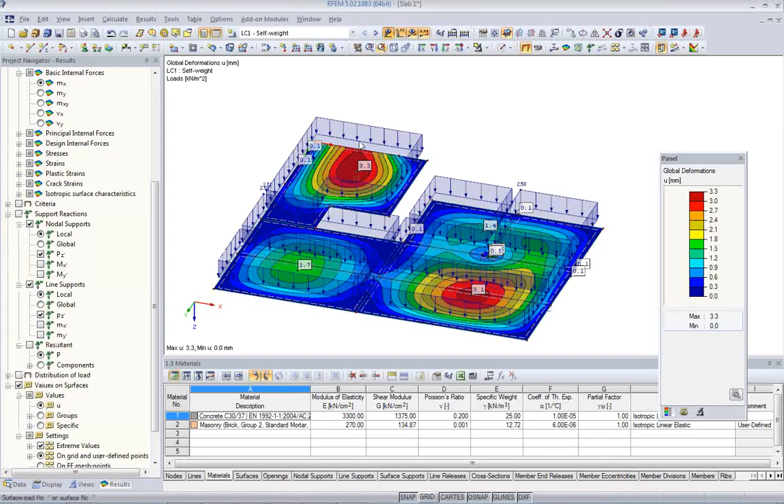So what I do now is use load case self-weight, where the load is all over, plus where the load sits on this slab. So load case 1 and 2. You do not have to work with the fixed load combinations that are created by RFEM. I can anytime create my own load combination with my own safety factors. And I do this now. That was the wrong switch. I create load case 1 plus factor 0.3, which is the typical factor for the permanent combination of the live load. Okay, click OK. Did I do something wrong here?

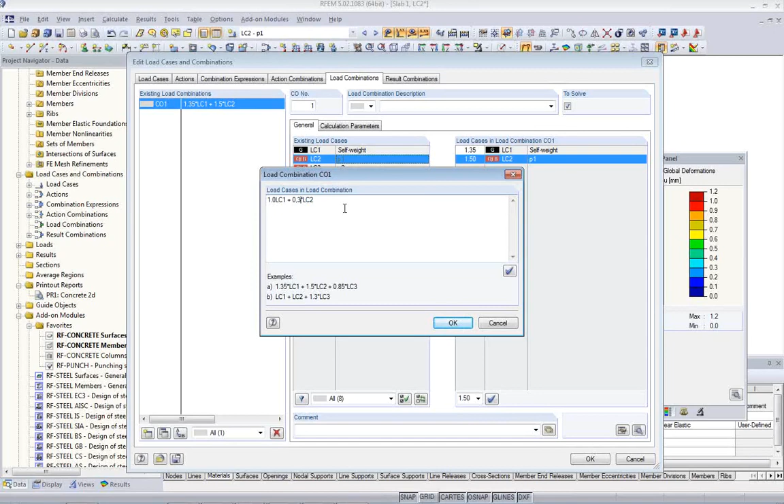0.3, and then here I need to have the delimiter. Okay, and then I have my load combination, which I will use for the deflection design. Now I have an individual situation, all the loads are there and displayed like this. I can run the analysis of this load combination and get a set of results. Note, the deflection here is 3.6 millimeters.

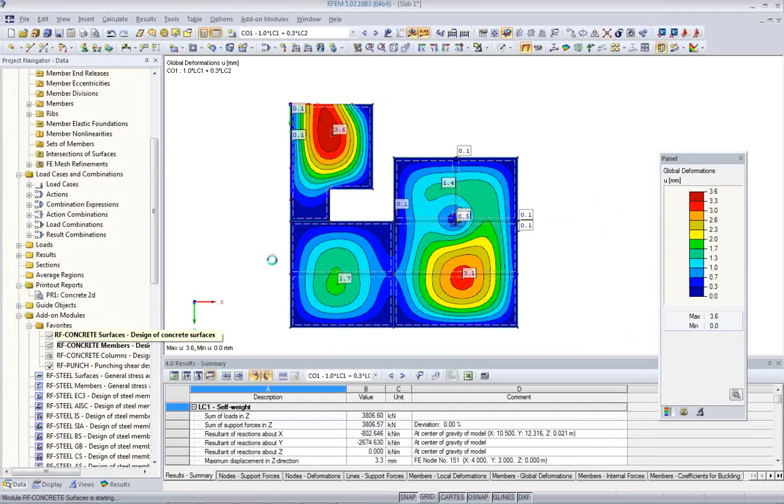When I do this now in RF-CONCRETE in the cracked situation, I'll get the following result. Let me open the module one more time. I'll uncheck this again and not use the deflection module here. Here we analyze the regular results. We can do this quickly. And then I'll copy the case and call it deflection. So I work with the same settings when I analyze the deflections, and here I say I would like to do the deflection analysis.

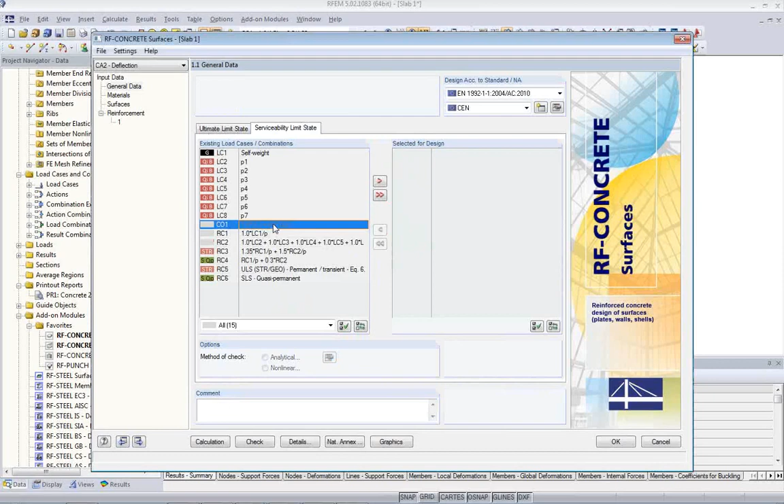But not with the quasi-permanent combination, but with the combination that I just created for deflection. I run the analysis, and now it's a nonlinear case. As a result, I get a nonlinear deflection, and we can look it up in the serviceability design. Here we see a uz local total of 16 millimeters as the existing value. The limiting value is not quite right. I forgot to set this.

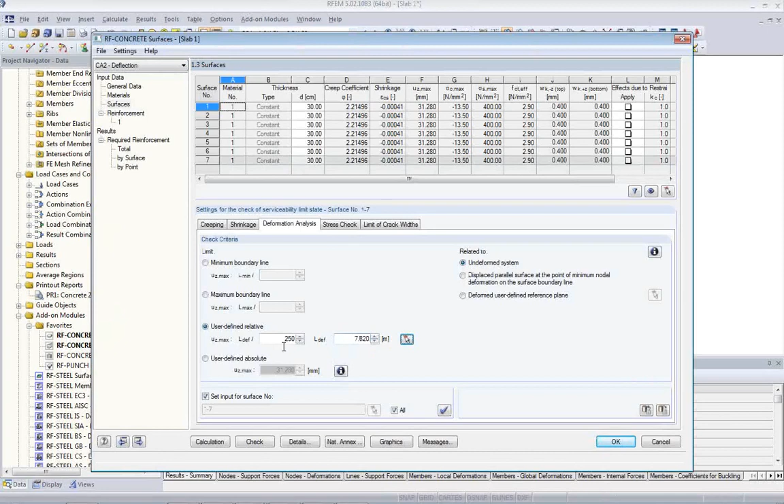When I do the deflection analysis, I get different tables with the deformation analysis, and I can set the limiting value here. I can define the limiting value as the maximum length divided by 250, for example, and I can pick this distance from here to here. So we talk about 7.8 meters, and the limiting value will be 7.8 meters divided by 250. When I run the analysis again with this limiting value, we should be quite okay.

And we see here the required is 16, oh, hang on, total. The limit is 31 and we have 16, so the utilization ratio is 0.6. And the concrete stress problem is again here at the column. Okay, which reminds me that I also have to show the punching that I forgot.

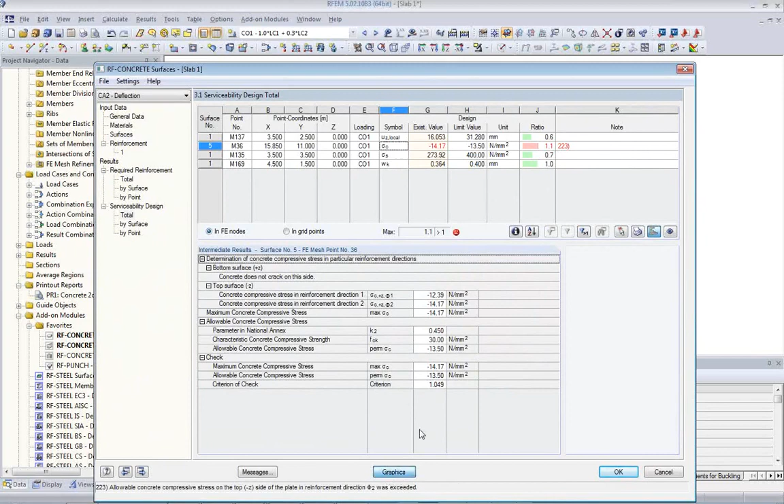Please note that we have the deflection. We can also show this now here in the graphic view. Results, serviceability, deformations. We have here 16. And if I show the same thing, maybe I can view a window, different window, new window, window parallel. And here is the nonlinear, and here will be the linear, which is only 3.6.

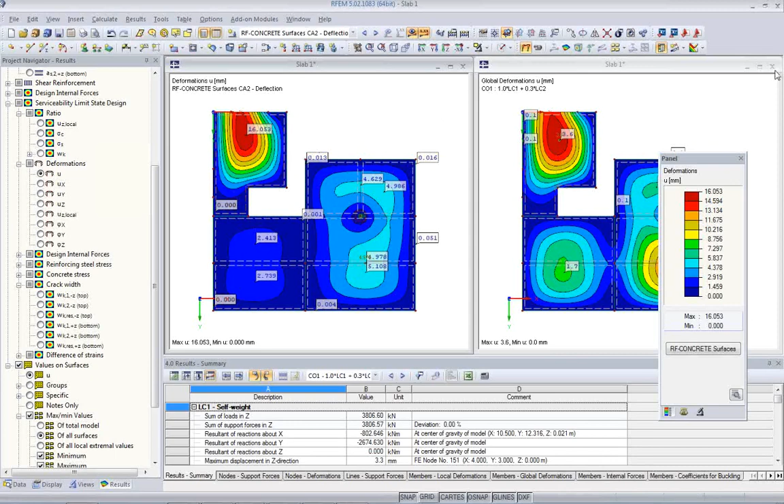Is that correct? Yes. So we have about, or almost now, 4, 3.5 to about 4 times more of the deflection, between 4 and 5 times more of the linear deflections we have in the nonlinear situation. Okay, this was this question, and then let's take a look at the punching check.

We have here this situation where we have a lot of force that is concentrated on this column here. With the module RF-PUNCH, we can check this, and this will not take us very long. We'll open it. I'll use the ultimate limit design situation. I use Eurocode again. Materials, we've seen several times now.

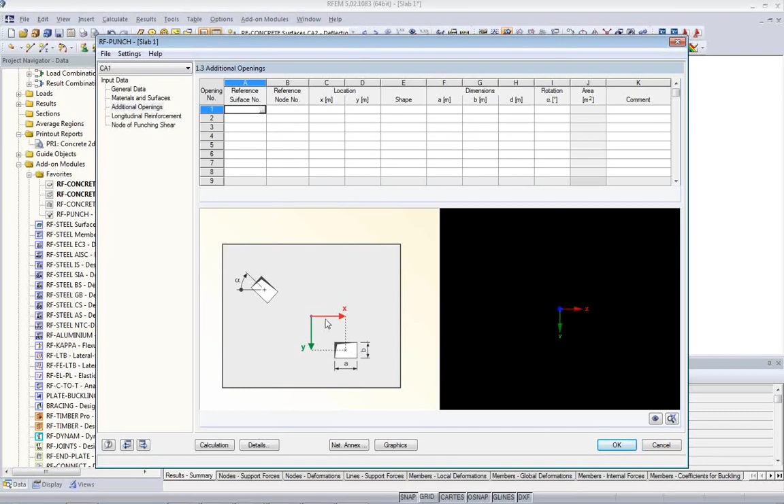A specialty is that I can take into account openings around the point support that will reduce the shear capacity or the capacity against punching. I can enter the location and the type of the openings here. We have longitudinal reinforcement that can be defined by the cover and by the direction, which is now, as always, 0 and 90 degrees.

And we have here the individual node for punching. It already knows the node where there's just one support, node number 6, which is also set up here. We know the surfaces that are connected to this node, and I can put here the dimensions of the column.

Okay, I can enter here all the code parameters. I assume the position is somewhat in the middle of the slab. The shear reinforcement should be designed, if so, vertical. The reinforcement should be laid out. So it will now create a reinforcement first in longitudinal directions, and if I can provide enough reinforcement that punching is not a problem, it will not introduce any shear reinforcement.

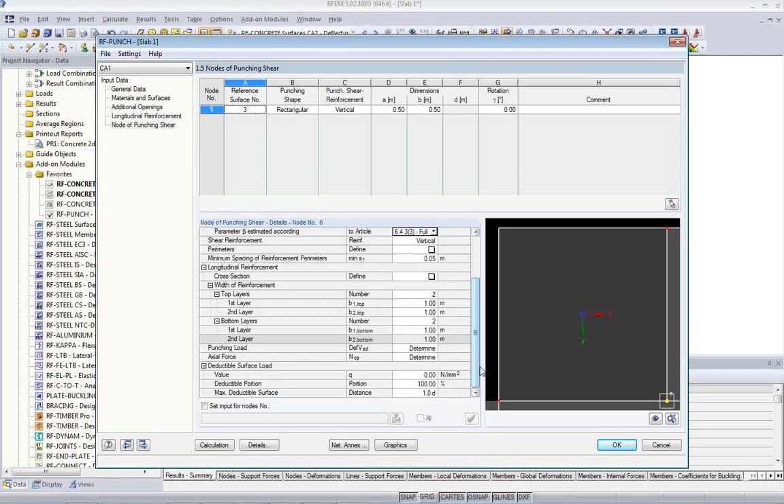Okay, and with this I run the analysis, and I get here a design criterion of 1. And if I look at the details, I have effective, what is it? Where is my reinforcement content? We can take a look graphically as well. So the applied force is 659 kilonewtons with the maximum shear stress, basically.

There are moment in center of perimeter in x direction, and all those minimum moments that have to be taken into account are set there. Here's the applied shear force, 925 kilonewtons. The governing punching load is the same, and then we should get some required reinforcement at the end, and the design is the resistance for shear and the maximum force which is there, and the criterion ends up then as 1.

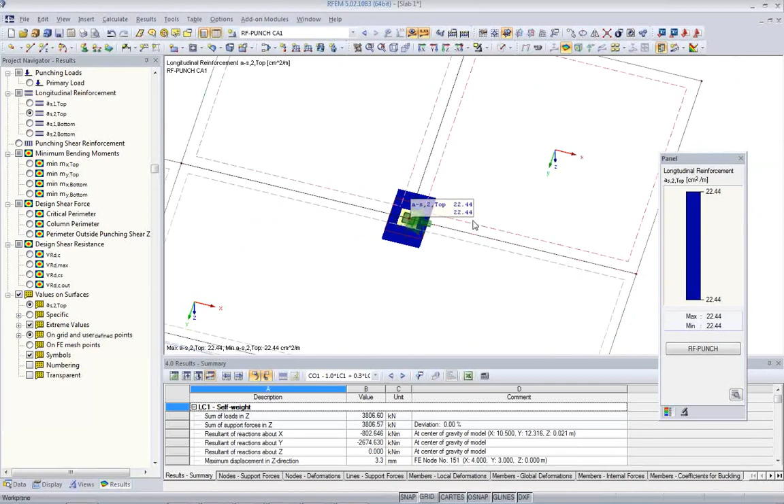If I look into the graphics, I can show my required reinforcement on top, which is 22.4. I can also show again the value. Maybe this time I only want to have the extreme value. Top, the other direction, and I get my values as well here. So this is the punching shear check, which is done in the module RF-PUNCH. Okay.

This was the live demonstration. I'm sorry for the slight problems that we have, but this is live demonstration, and things like this I guess can happen, and I'm apologizing for it. I hope it still was a good webinar for you and you've learned something.